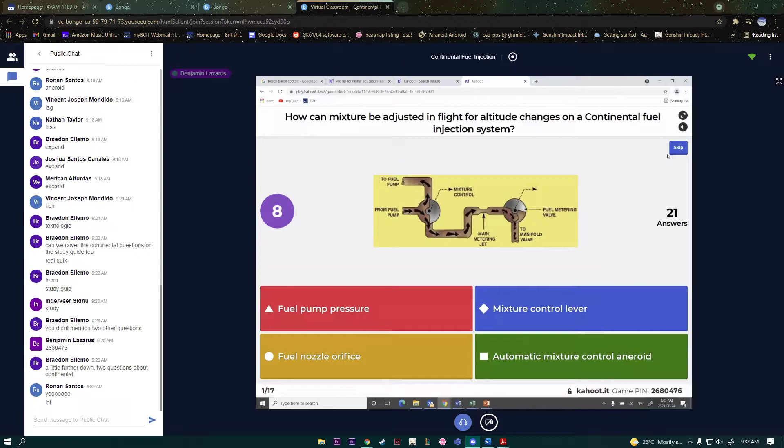Right. Yeah, I'm not as happy on the green because it is basically using that turbocharger aneroid, but they will always have a mixture control lever. That's your best answer.

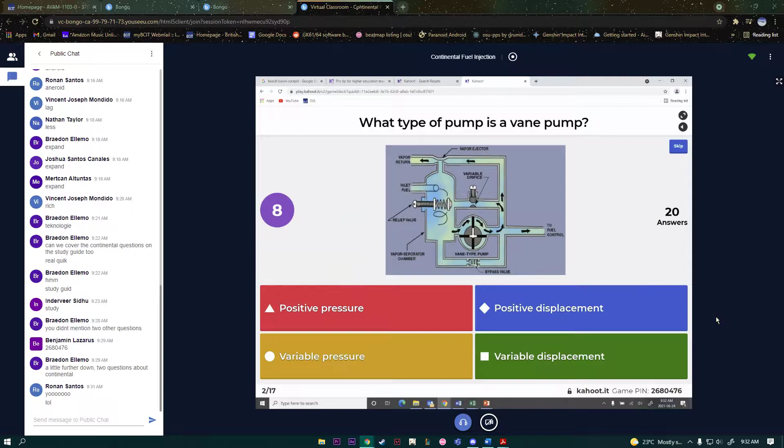Right, a positive displacement, meaning that when it makes one revolution, displacement. Remember we talk engine displacement? How many cubic inches of air does the piston displace when it goes up and down? Our engines are basically an air pump, but they are not a positive displacement air pump because we've got all this stuff going on with valve overlap, and especially because what we pump is a gas, and you can get more or less gas.

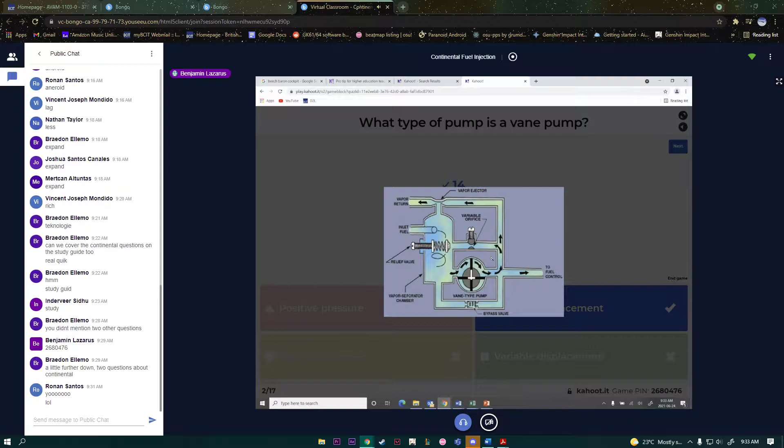It's not a fixed amount. When we're pumping a liquid through a positive displacement pump, like I said, if you put one revolution, at one revolution it's going to pump 1 cubic centimeter of liquid, and it'll break or pump that much fluid. Oops, that's not what I meant to do. I meant to hit this one.

Right off the engine. Yes. Variable speed drive from the engine. Okay, so that one's confused a few people. Maybe you're thinking that it speeds up and slows down. There is a type of drive called a variable speed drive. What that means is you can change the gear ratio. So sometimes the engine moves one revolution and the pump does one, and sometimes the engine moves one revolution and the pump does two, like a multi-speed.

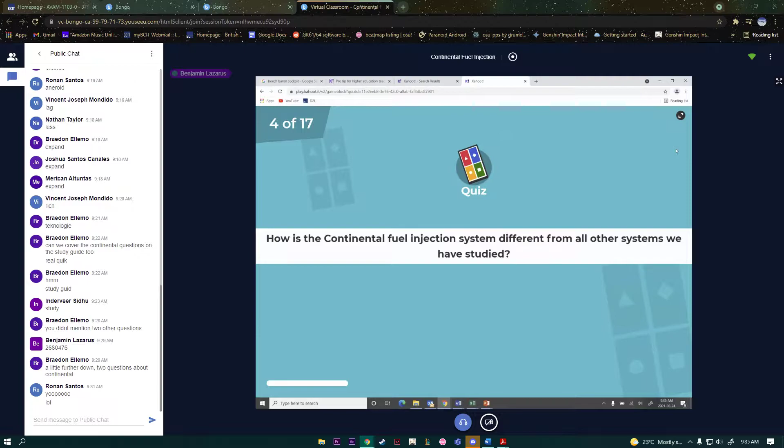It is a direct drive off the engine. You took it off your engine. Remember, there's a gear off the back of your fuel pump, directly driven off. I think it's the camshaft gear, and nothing changes. The direct drive. Nice. Airflow is not measured. There's no venturi. Good. Lower pressure. It's the same pressure. Very similar.

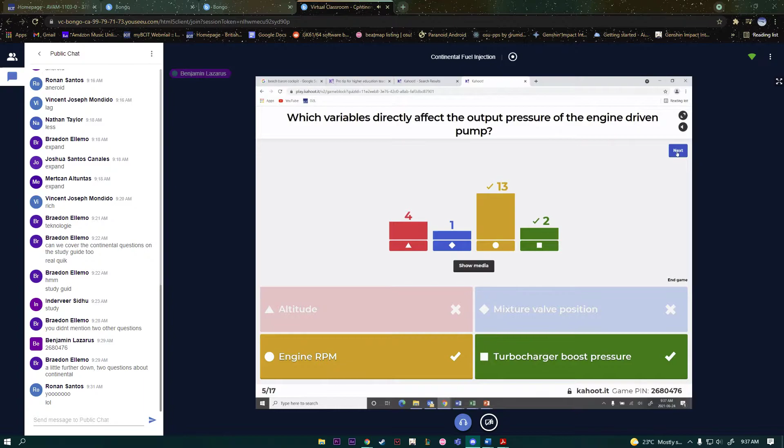Yeah, altitude not so much. Turbocharger boost pressure. Yes, and engine RPM. Engine RPM being the best one. Haven't talked about the electric boost pump much. There's a picture of one though. How much control does it look like it's got? Not much. 2 wires. You can turn it off. You can turn it on. And you can turn it back off again. Nope. They're just 28 volts.

There are some I've heard of that have got a selector. You can do low boost and high boost, but I have not seen one like that. I remember hearing somewhere that they exist. So it's just going to put out whatever pressure it's designed to put out, and they function a little bit differently, and they do their best to always make 25 psi or something. So I suppose the throttle position might kind of affect the whole system, but for the purpose of understanding the theory, you turn it on and it makes its pressure.

Students do surprisingly bad on this. I thought this was like the easiest of my silly questions. And then I saw the results and thought, my gosh. You guys did pretty well. Pretty good. All right, could be. The question said, what part moves only diagonally?

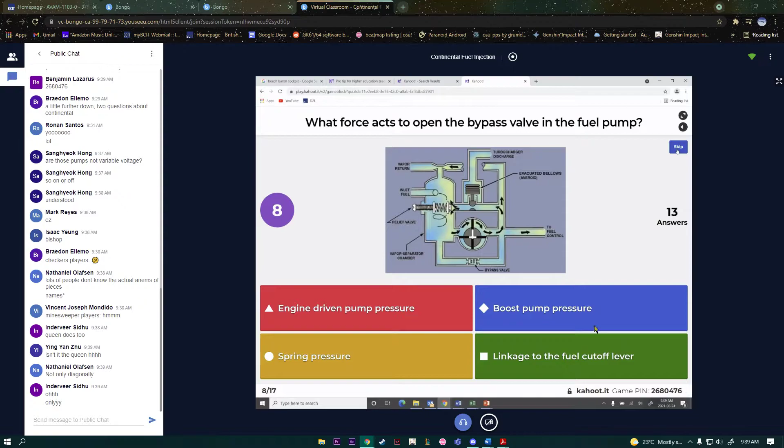Boost pump pressure. Right, spring pressure. What does this spring do? Does it open it or close it? The spring closes it. There's the valve plate right there. Let me pull this up. Obviously, that couldn't get understood well. Here's my bypass valve. Down here, spring is pushing this way on this little plate. When that plate is moved to the left, the valve is closed and the spring is pushing it closed. If I've got a boost pump forcing fuel down this thing's throat, it will push past there.

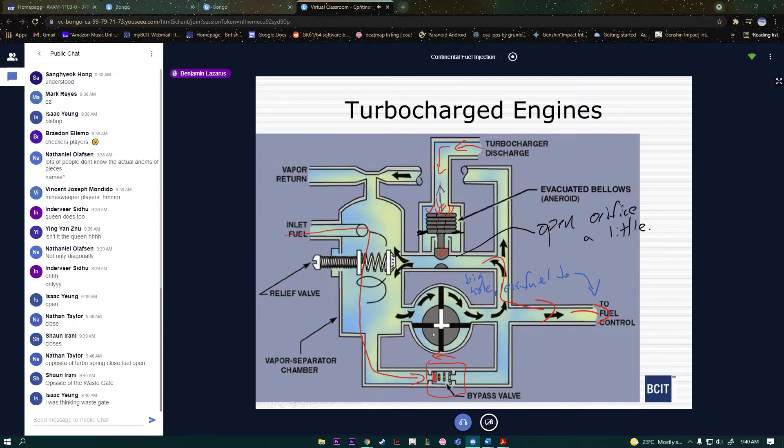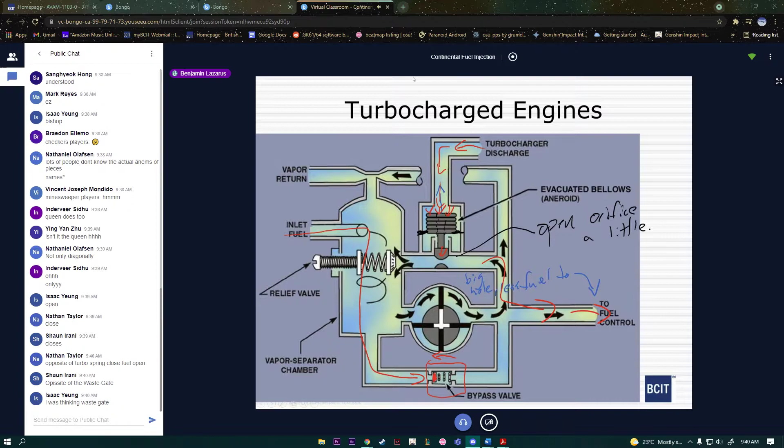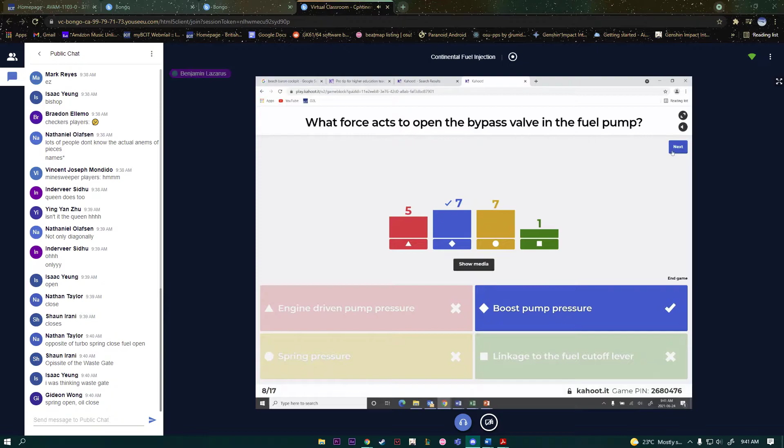Wastegate. Oh, that's turbocharger. Oh, I see. Because I said in turbocharged. And you're thinking the wastegate bypass. Ah, I see where the confusion came from. I was talking about the bypass valve in the fuel pump. Let's go back to my Kahoot. Spring open, oil close. Yes. But the bypass valve in the fuel pump is spring close, fuel open. Well, or fuel close. Depends on where the fuel comes from. So I see why. Fuel pump bypass valve.

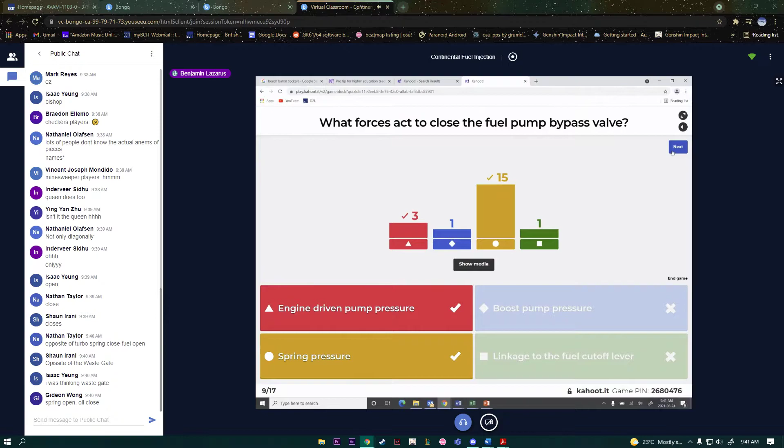Right. Spring pressure, and then the engine-driven pump pressure will also help, if you want to get creative.

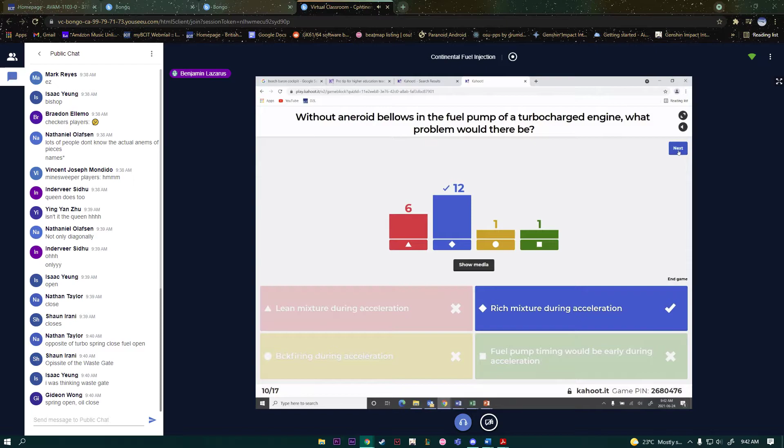Rich mixture during acceleration. Well, at least everybody was picking the mixture thing. Remember, we would end up with the turbo lag, which means I don't get enough air. And if I deliver all of my fuel and not enough air, it will be too rich. Opposite problem from carburetors and other systems. But without the turbo boost all the way there, you'd get all of the fuel and not all of the oxygen. That's too rich. Engine's going to really hesitate and struggle with that.

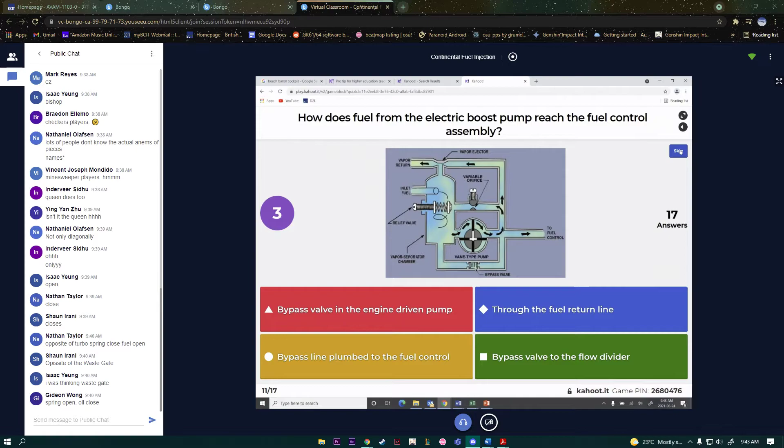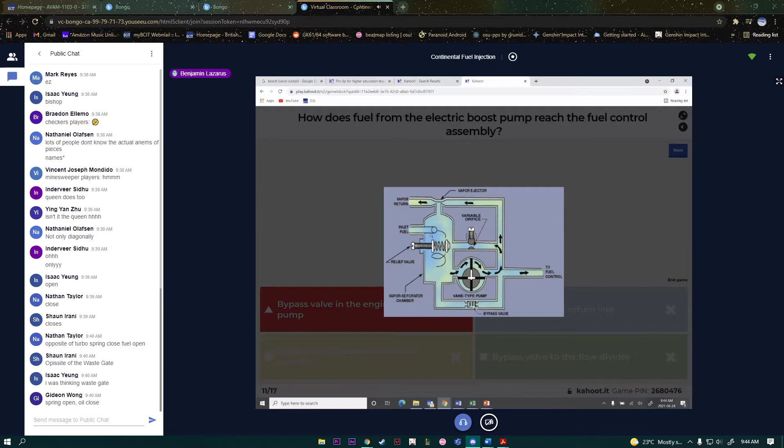Bypass line plumbed to the fuel control. Well, at least people got bypass. This bypass valve right here is built right into the pump. That's why the correct answer is bypass valve in the engine-driven fuel pump. It's right inside the pump, right inside this housing. TCM, Teledyne Continental Motors.

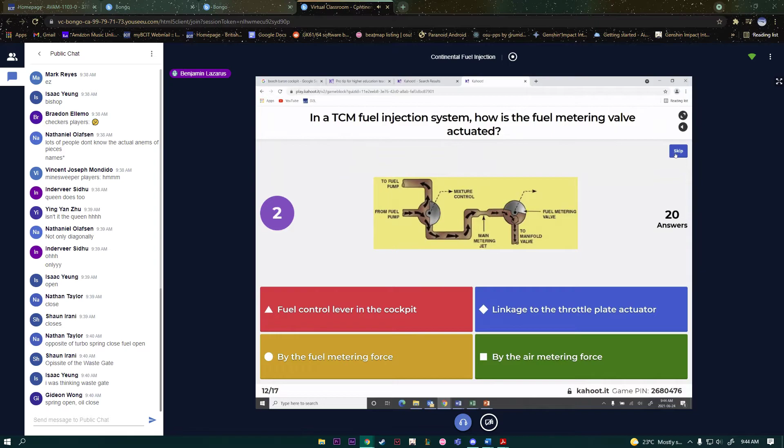Nice. Most people got it. Fuel control lever in the cockpit. You're thinking mixture control, and that's the other valve. There we go. Control lever in the cockpit. Red handle.

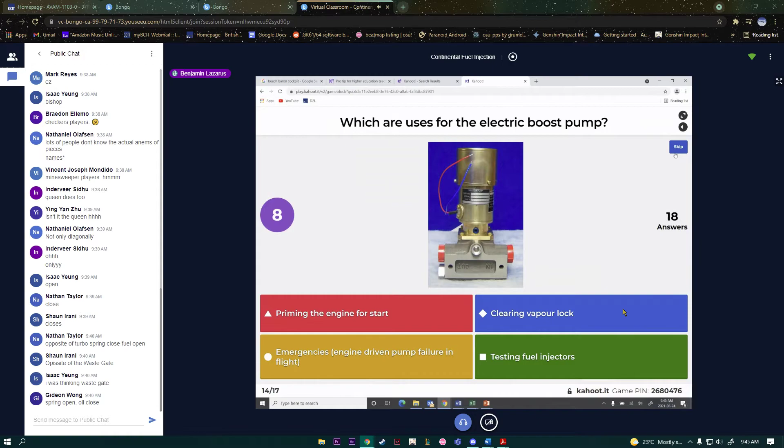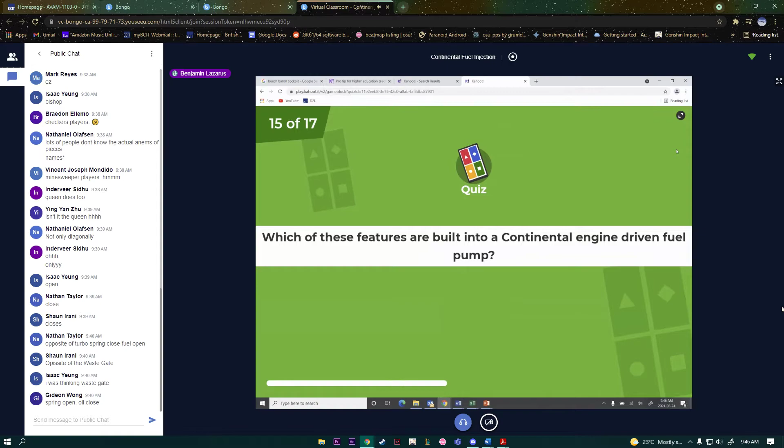This one's pretty easy. Seriously, this one's really easy. Like, this is the kind of question that students really want on the tests. See? This one's really easy. Like, all you needed to do was pick something. Nice. And no, that question will not be on the test written like that. I don't think I'd pass the Transport Canada audit if I did that.

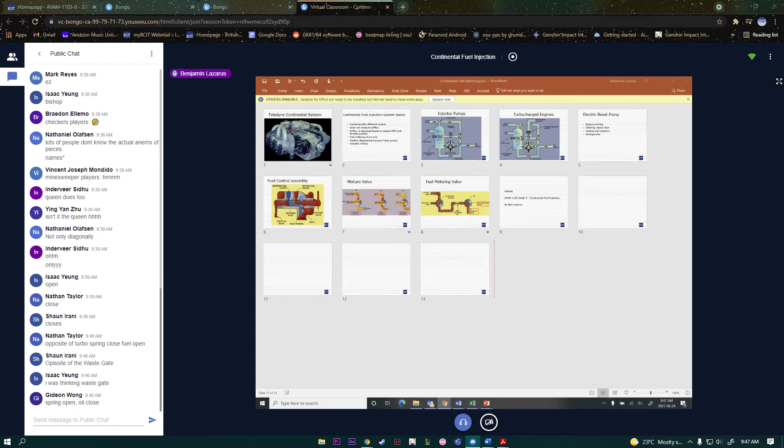Oh, I didn't talk about this one much. Fuel return valve, there's an orifice. Overpressure relief valve, that's our low pressure. That's not an overpressure relief valve. Shear shaft. Most of you, some of them are missing, but most of you should have had a shear shaft drive for your fuel pump. And I'll just draw one of these things for you. Yeah, this will work.

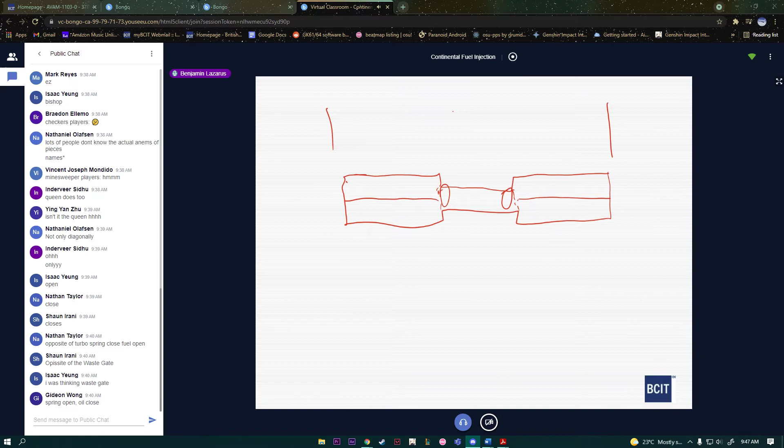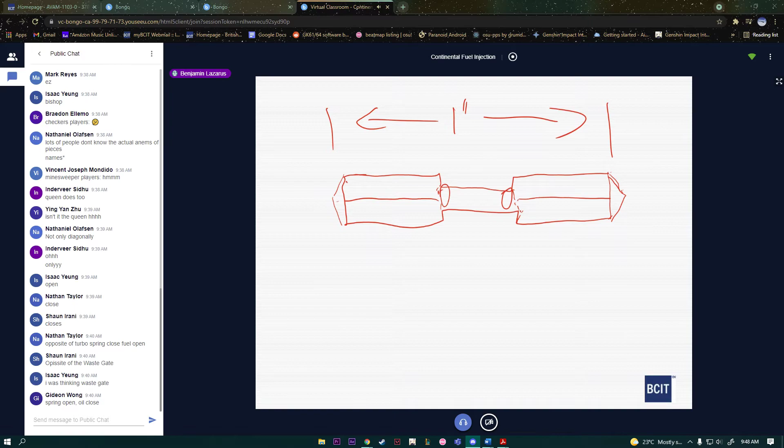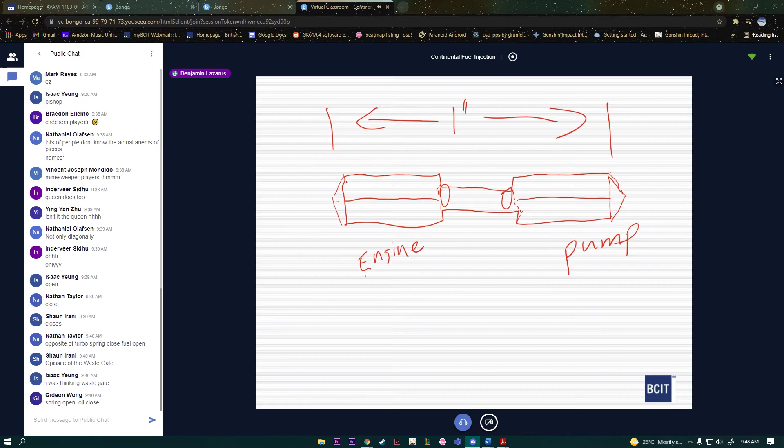Your shear shaft looks, this is kind of a blown up view of it. These parts here were square, and this part here is round. I've blown this out; this whole thing was about 1 inch from there to there. And the point of this is, let's see if I can draw this a bit better. Your pump is going to be on this side, and your engine, and this is built inside the gear. This slid into the slot there.

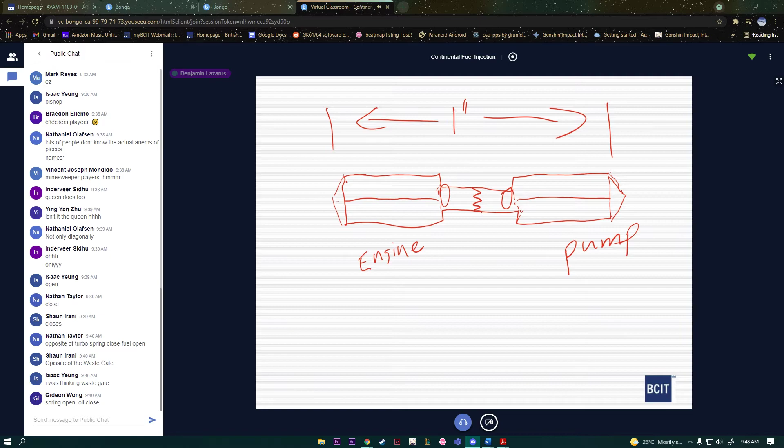If your vane pump breaks or jams or whatever, this will break right here and allow the engine to continue to turn even though the pump has ceased. You'll find that in various places in mechanical devices. They'll build a weak link. So don't worry too much about that one, but good to know.

Cruise power. It's what we call our high unmetered fuel pressure. How do we adjust the high unmetered fuel pressure or cruise RPM? I haven't given it the same name. Relief valve screw. Okay. I deliberately gave it a little bit of a different name in here to see what you're understanding. The relief valve screw does not adjust cruise power. Cruise power is the variable orifice, and that is the return orifice. And my fuel is returning within the pump.

I named it differently. I won't do that on the actual test, but I'm hoping you understand that this return orifice, this variable orifice, is a return path for the fuel. So sorry if I confused you on the Kahoot, but this is something you're going to want to know tomorrow.

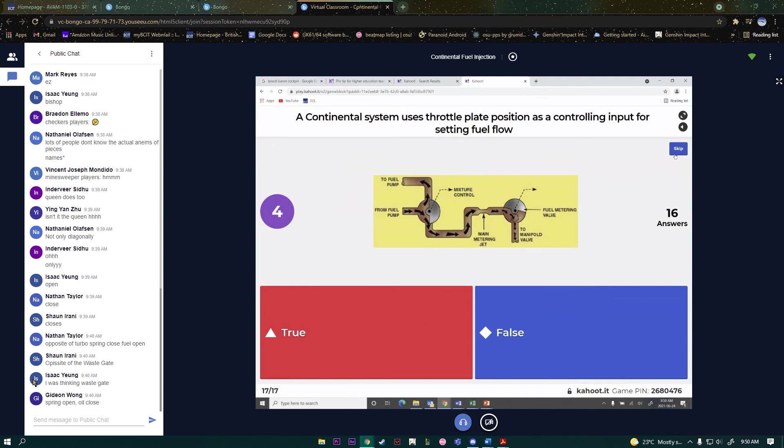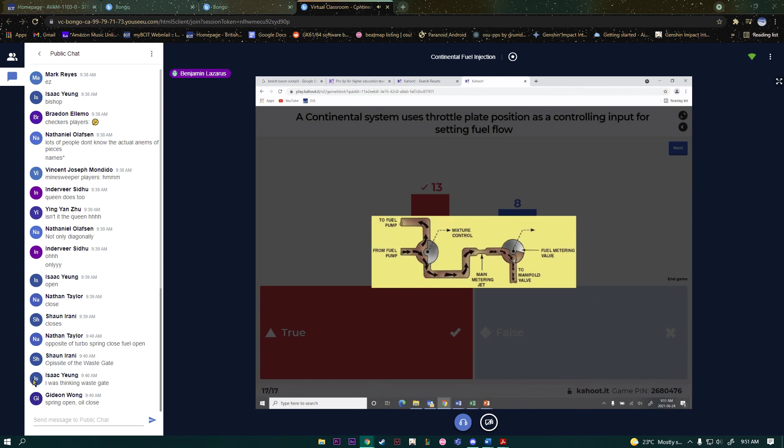Yes, it does. The throttle plate position is directly linked to the fuel metering valve. So when the throttle plate is wide open, this valve will be wide open, and that is a controlling input into this system. In the Bendix system, in a carburetor, there's no such thing. Well, I shouldn't say that. There is in the Bendix. There is not in the carburetor. In the Bendix, there is, but it's not got nearly as much authority.